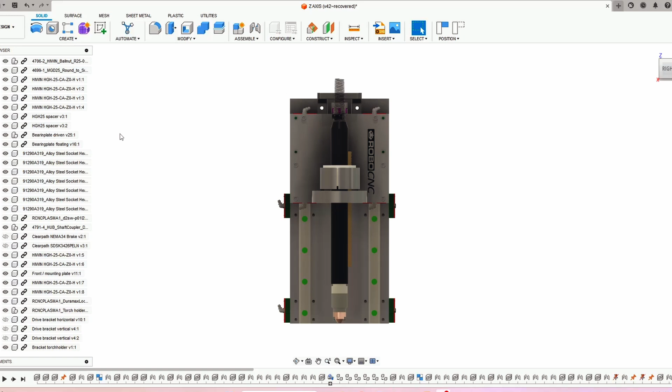So here we are in Autodesk Fusion, which I use to design the machine. This is the computer-aided design. Here we see the Z-axis as I'm planning to make it. Some parts are still missing, but we'll see those later on.

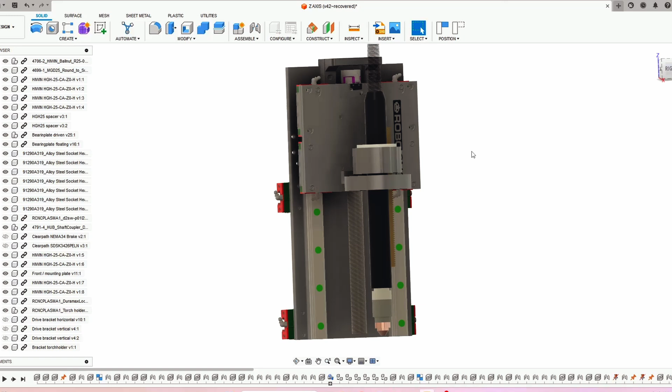It seems to be a bit of a beefy Z-axis, which is correct, because in an ideal world I hope to also be able to place a spindle on here when I take the torch off.

Anyway, we started in the first video with this machine torch and the Z-axis anti-collision system, and now we see some strange motion going on here in this Z-axis, which I'm going to explain later on.

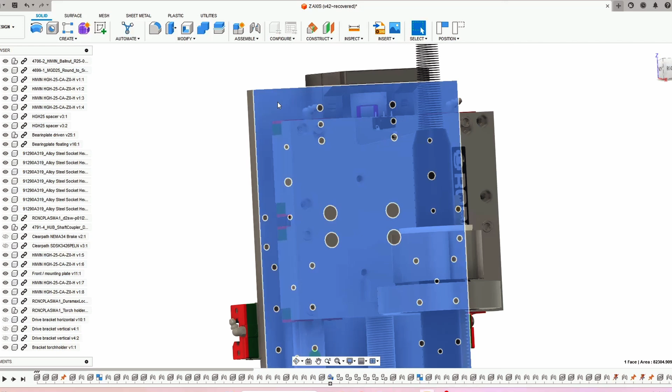But first we need to machine some of these aluminum parts. So let's hop into the workshop.

So the aluminum parts are ready. I'm starting the assembly, and if you want to skip over to the assembly you can do so due to the magic of video editing, because this video is chapterized.

If, on the other hand, you want to know how I made these aluminum parts on the CNC router that we built in another video series, you can see some small footage on the machining. So let's go.

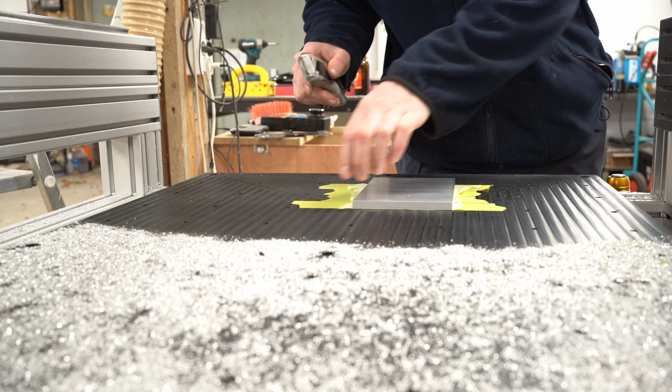It works absolutely amazing. You put the glue on one side, put the activator on the other side, align the part with some bolts, push it together, and it's tight - really holds on there firm. So I take the remaining tape off to prevent coolant from getting under the part due to capillary effect.

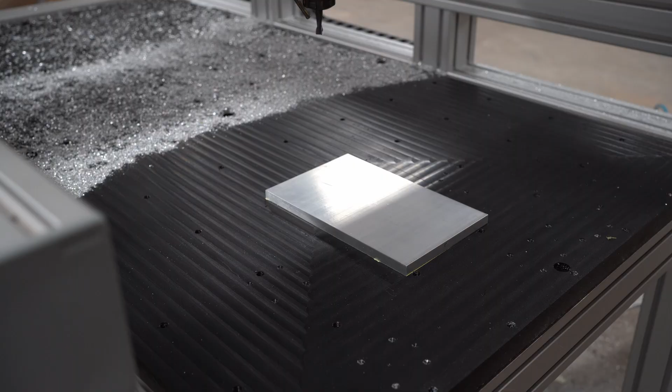So now it's time for machining, and I have no clamps to worry about while machining, which is absolutely fabulous. I made this strategy with Fusion CAM, computer aided manufacturing - it's the 2D adaptive strategy to prevent having to have a full width of cut.

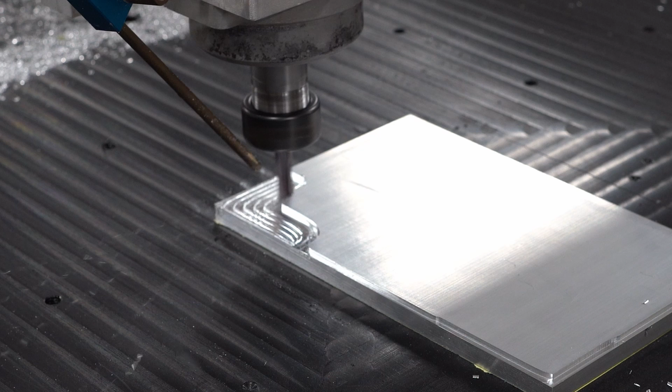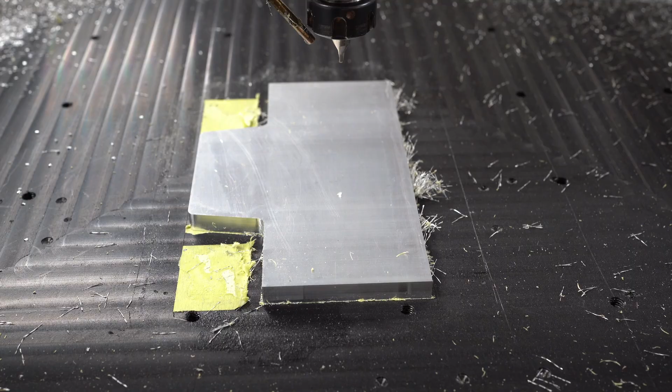You see me machining, and you see a mist coolant system - this is the Fog Buster, which I have a complete video on elsewhere on the YouTube channel. The coolant used is IPA alcohol, so it gets really cold and evaporates quickly without leaving residue on the part.

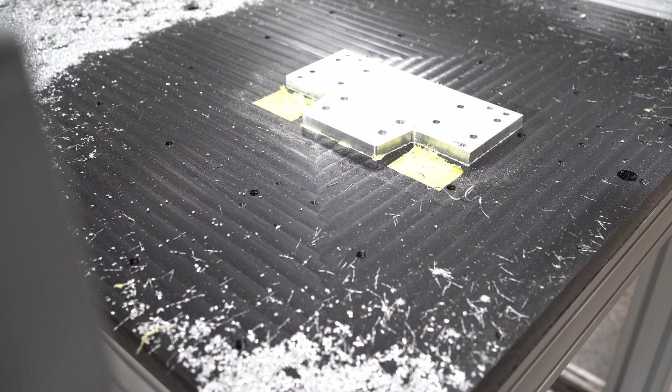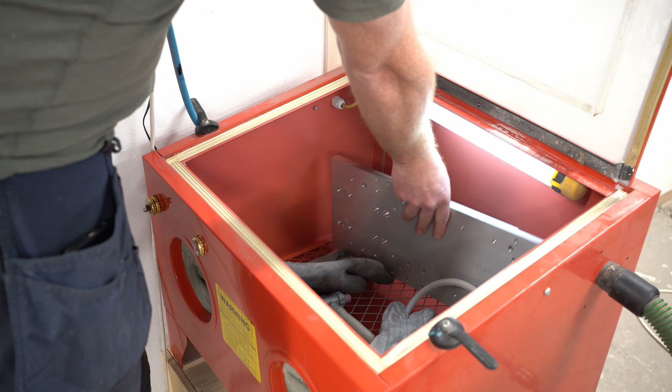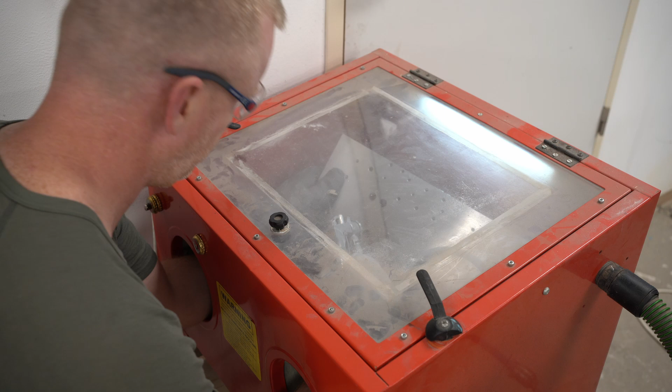So when the machining is done, you can break the tape bond and take the tape off, and you're ready to go. After machining in aluminum, I love to get a dull finish in the sandblaster - there's no sand in here, it's glass bead. The glass bead doesn't ruin the dimensional properties of the part, but gives it a dull finish with just some micro dents in the surface.

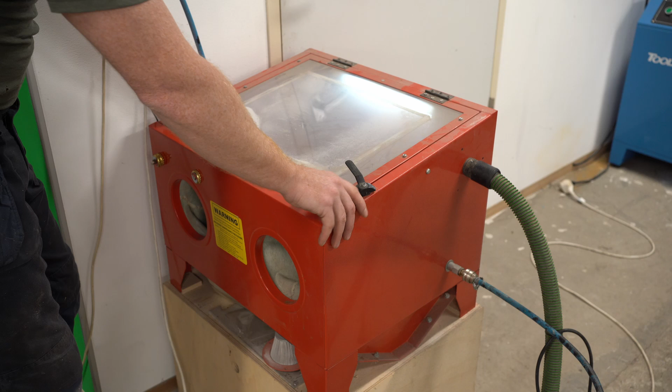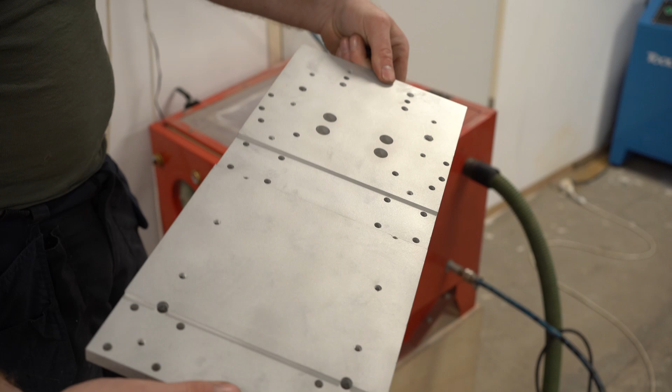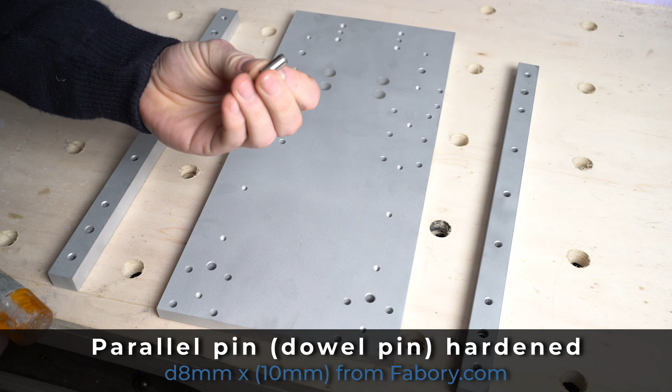So now it's finally time for assembly of the Z-axis. What you see here is the back plate, basically the backbone of the complete Z-axis, and on the sides are some spacers. These pins are 8mm precision dowel pins, and they make sure those spacers can only be placed on there straight and exactly parallel to each other.

Now, since we're going to use quite a big ball screw, a 25mm ball screw, I need those spacers between the linear rails and the back plate to give me some more space between the back and the front plate.

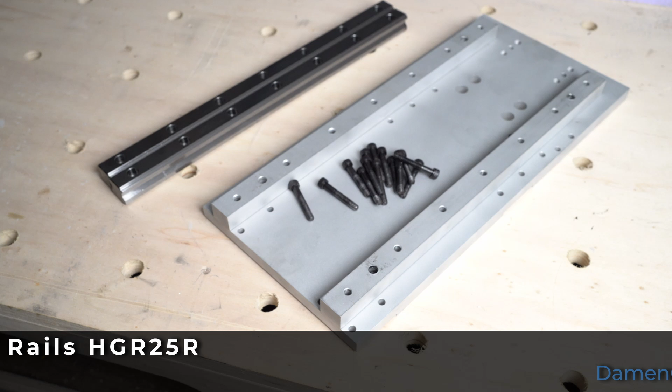So the rails I'll be using are the HIWIN brand, and I got them from DamenCNC. These HIWIN rails have an arrow on them pointing to the reference side, and although it's not all that necessary for this application, I tend to always put the reference side to one side. In this case it's pointing to the left.

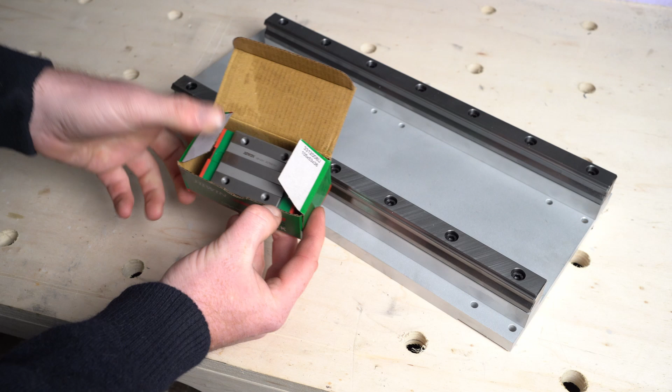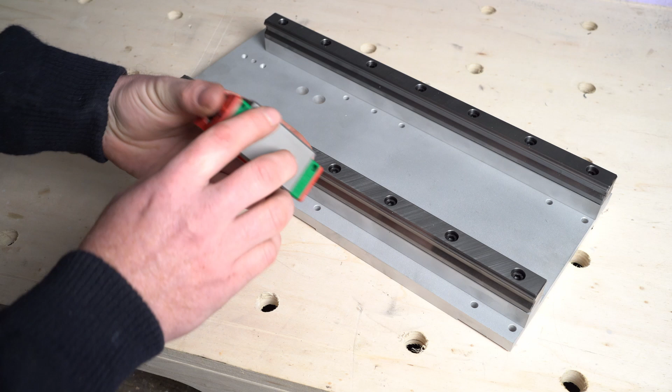So the rails are placed and the bolts are hand tight. Now it's time for the 25mm bearing blocks themselves. These bearing blocks are not symmetrical completely. You see one shiny surface and one dull surface on the side. The shiny surface is the reference side, so not this side, but this side is going to point to the left.

There's a little plastic ball retainer in there to make sure the balls of the bearing do not fall out. So push it against the rail, slide the bearing on the rail, and then you have the plastic part.

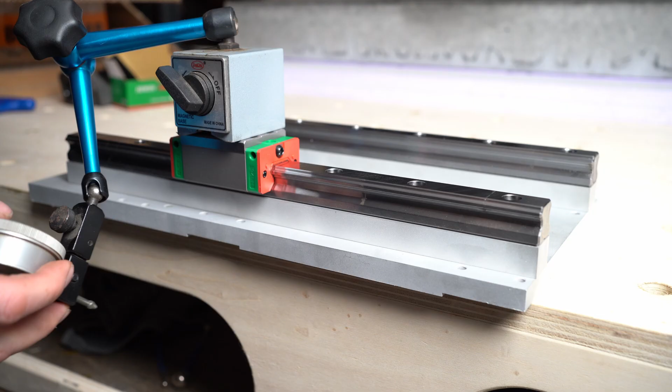Now it's time to align the HIWIN rail to the left side of the back plate. The left side of the back plate will be my reference. I use a magnetic dial indicator to align the left rail to the left side of the back plate.

When I was happy with the left rail and it was parallel to the left side of the back plate, it's time to align the right rail. So I put the magnetic base on top of that and I reference to the left rail.

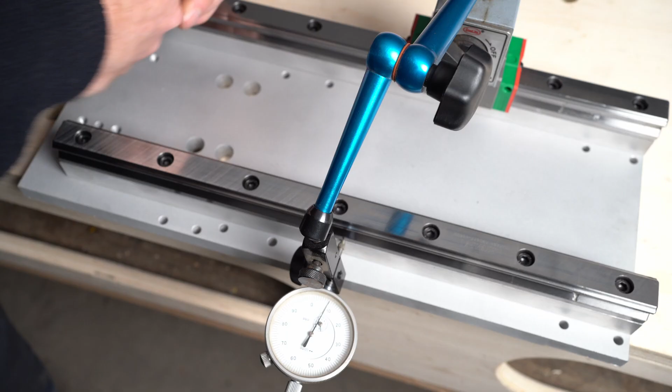Now the last part of the alignment puzzle for now are these heavy duty slotted spring type straight pins.

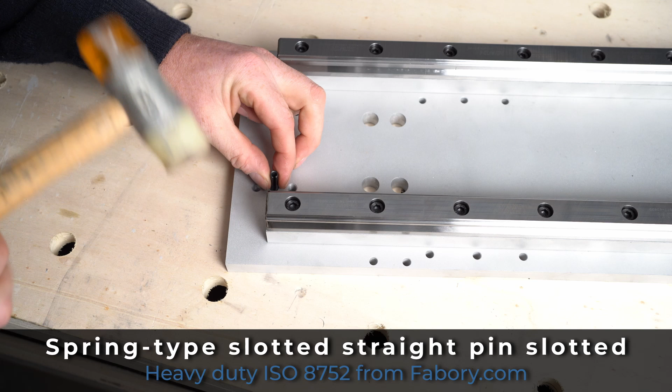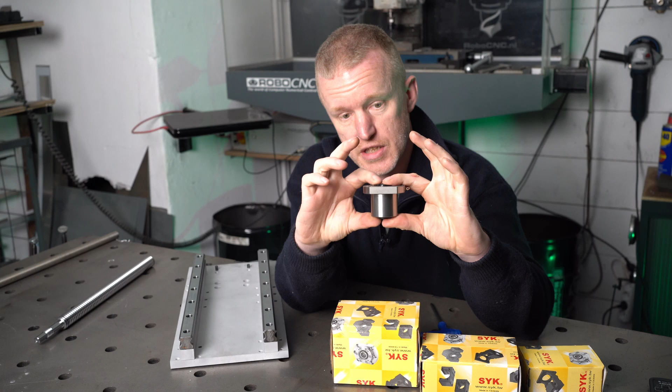The linear rails are on the back plate with some spacers, and the reason for that is that I'm going to use quite a big ball screw. This ball screw is 25mm with a 25mm ball nut.

Is that needed for a plasma table? No, it is for sure not needed for a plasma table, but as I told you before, in the ideal world I might use this Z-axis also for a spindle, like a router spindle, and in that case I would opt for a bigger Z-axis, so let's just make it big.

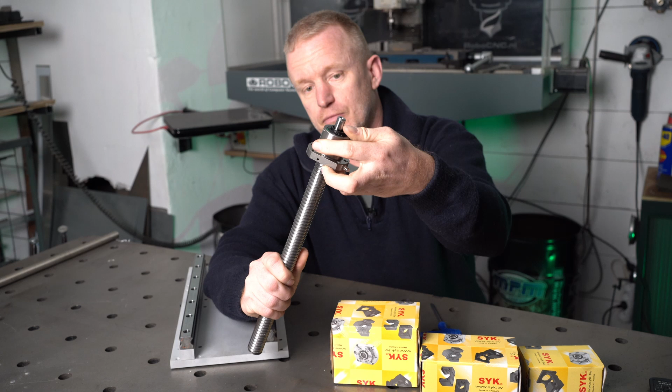A ball nut and a ball screw have to come together, and I've seen colleagues of mine, I will not call them by name, but I've seen them taking this off a ball screw, and afterwards they are on their knees finding all the little balls that are inside here. So if you want to do that, make sure to have a plastic ball retainer, just like with the bearing blocks from HIWIN.

I use the same technique, by using a piece of plastic to keep the balls inside here.

Now this size makes the need for the spacers. It will go in here, but to mount this all I have some SYK parts from Taiwan. I didn't order these from Taiwan SYK directly, I ordered them from RoboCNC.

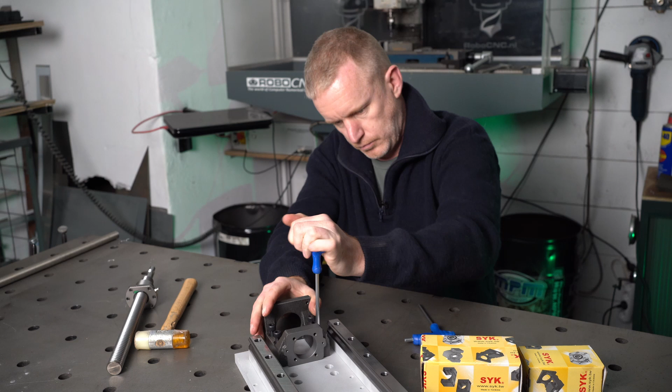So this bracket, the MBA15F from SYK, is going to hold the NEMA 34 motor on the top side. On the bottom side it's going to hold the FK15 fixed bearing for the spindle, and here in the middle there is some room for a coupler.

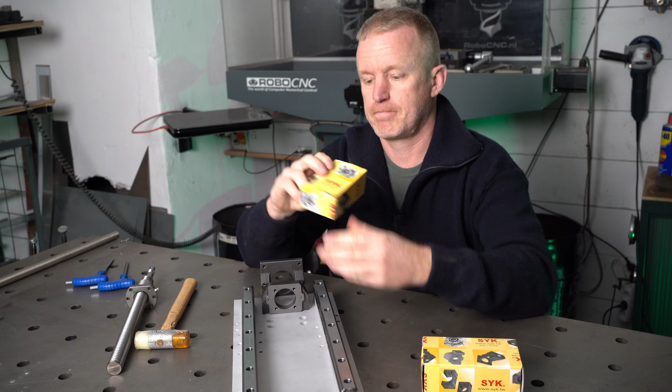Now this bearing, the FK15, perfectly fits in here.

So inside here is a double row angular contact bearing, if I remember correctly, and that takes up the radial loads like a normal bearing. Because it's spinning, it has some radial loads, and that's taken up by this bearing. It's supported by this bearing, but also the axial loads.

So this spindle is going to push down and upwards, and especially when there's a router or spindle on the z-axis, there will be a lot of axial loads, and that will be taken up by this bearing.

As SYK told me, there are a lot of clones of this bearing. You can buy these Chinese clones for a lot cheaper, but this is C3 quality, and that's not comparable with the C7, for instance, or whatever you get from AliExpress. Anyway, I will fix this now to the bracket.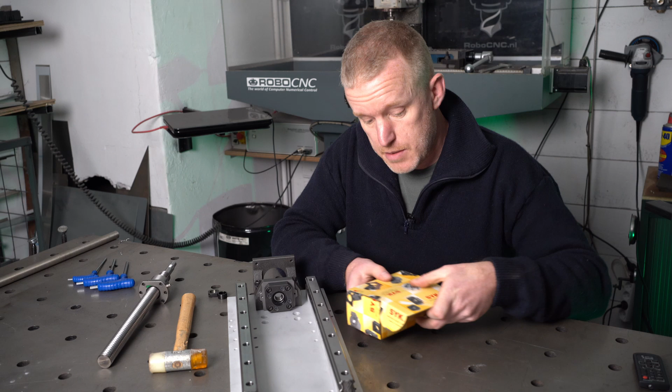So the last SYK part is this ball nut bracket. This bracket will convert the round formed ball nut bracket to a square one.

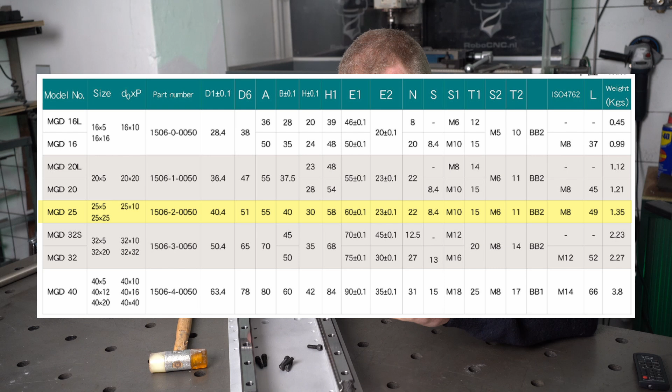To be honest, this is a bit beefy for my application, but it's not that expensive, and machining it myself, well... so let's put this on here.

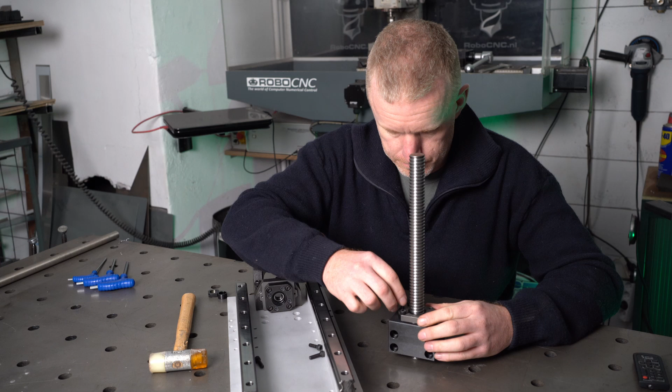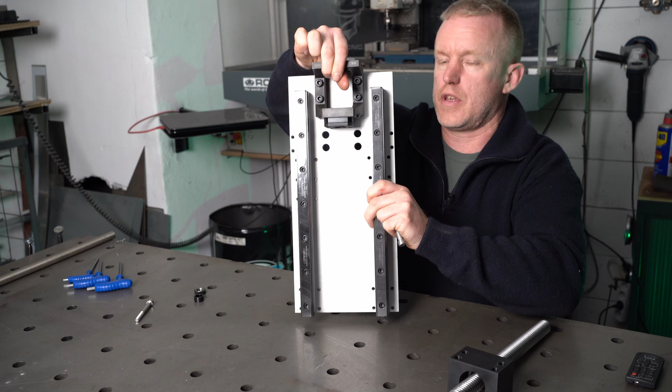Directional. On one side fits the bolt head to make it flush, and on this side the bolt sticks out. And now you can probably also see what these big holes are for.

So that I can mount these bolts. So last thing to do, fit this inside the bearing. These two little parts came with the bearing, a ring which goes on, and a locking nut.

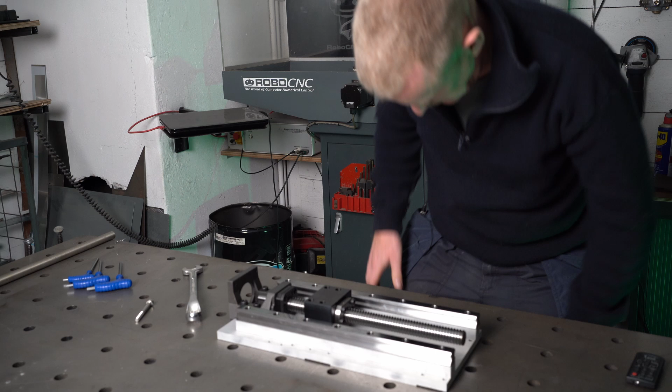Bearing blocks come with a grease nipple, which I will put on later. I will put the reference side up to the left side, push them on, and always keep these, they come in handy.

This thing is starting to look like a Z-axis.

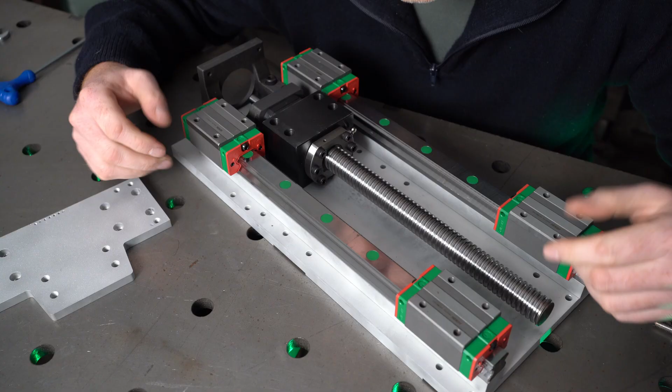So due to a battery failure, you missed out on the most satisfying part, and that is putting the green caps in. I'm sorry. You will have to subscribe to another YouTube channel to see that.

Well now, the next aluminum plate, and this one is the front plate, but it's the driven one. I will explain that later on.

This aluminum plate is now on the top row of the HIWIN blocks, and this is the plate that will be driven by the ball nut, or by the ball screw with the ball nut with the bracket. Now I have to turn this over.

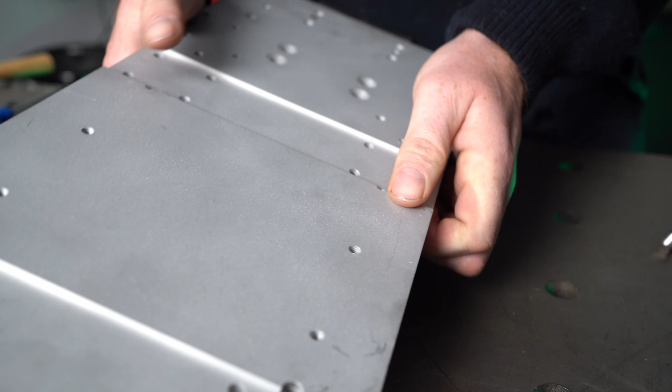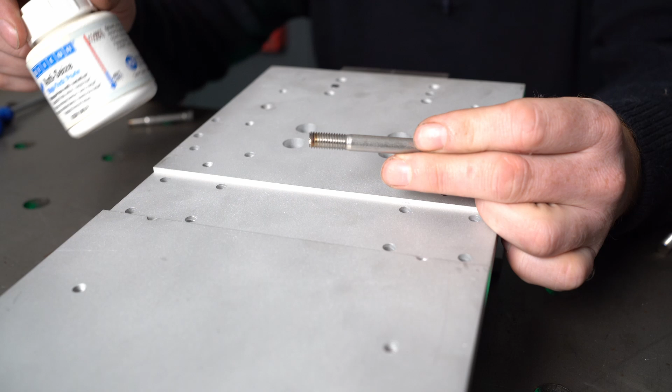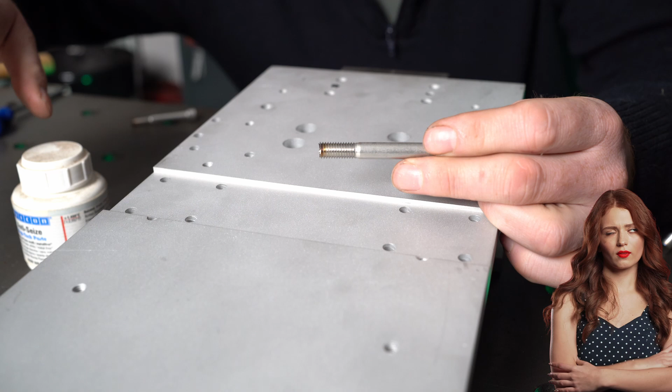And put these bolts through the bracket inside the plate. But since these are stainless bolts and the plate is aluminum, which I do not recommend, but why do I do it then? Because I had these laying around.

Use some anti-seize. Putting on a bit of anti-seize, because really stainless steel will seize itself in aluminum. Don't be as stupid as I am by putting these in.

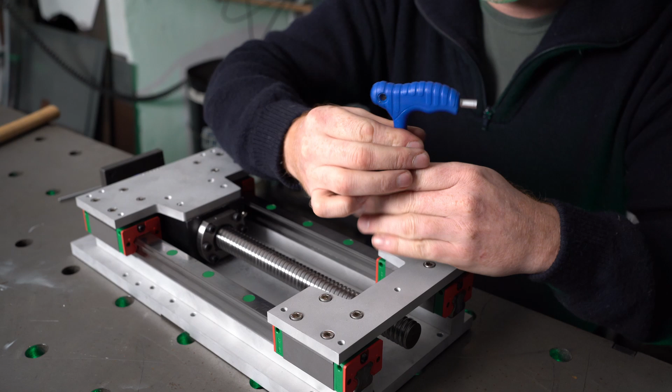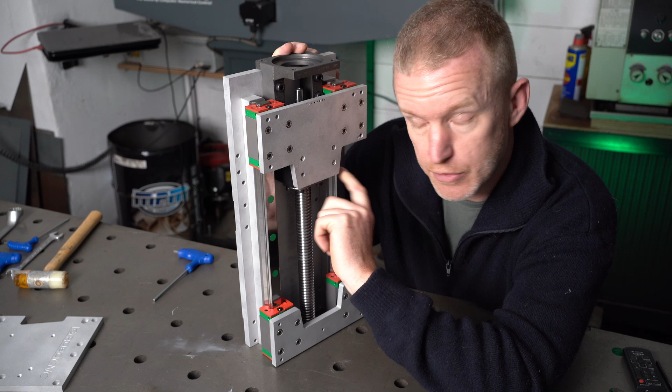So in theory, the bearing blocks should have been exactly the same height as the bracket that retains the ball nut. But in reality, there was too much friction.

So I had to use a thin sheet of copper to give it a little bit of extra space. And I didn't manage to film that, because I was crying, of course. So anyway, this is really starting to look like a Z-axis.

I will explain it in more detail, but this plate with the nice engraving should be mounted on top of this one, and then it should slide just in front of this plate. So if you manage to get that right.

Then you're fine, and otherwise you will have to shim this a little bit so there's no friction between this plate and this plate. So I will now mount this and we will see, and otherwise I will shim it again. Almost lost my bearings.

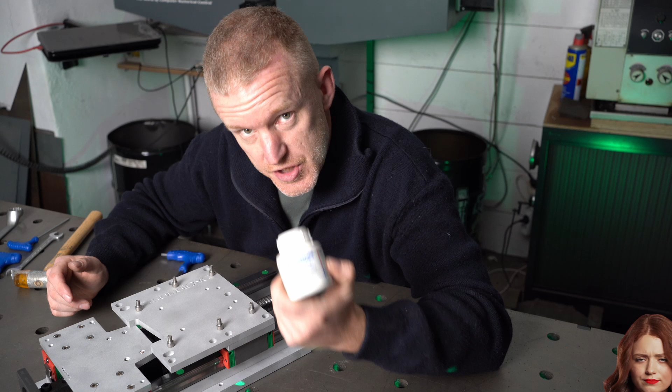Again, stainless steel bolts, because I had them laying around. In aluminum, use anti-seize. I really don't use stainless steel bolts, basically, in aluminum. And if you have to.

Maybe someone in the comments can explain why stainless steel and aluminum seize up. Could be interesting.

So it's not completely smooth, so I am going to shim it. So now it's smooth. Okay.

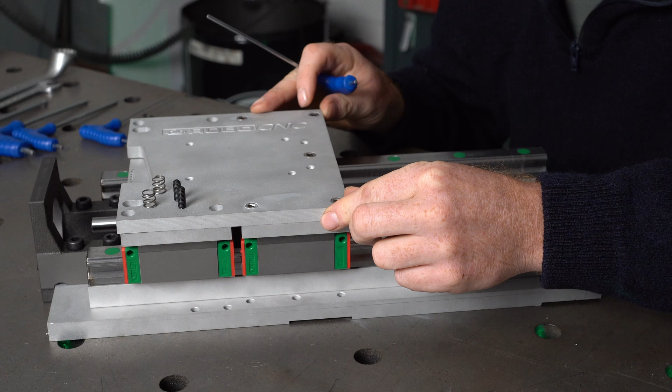Mounted on the floating bearing plate is the front plate, and this front plate needs to be fixed somehow to this top plate. So if I slide it up there, I could bolt it down when I'm going to use a spindle motor, but for now I'm going to use.

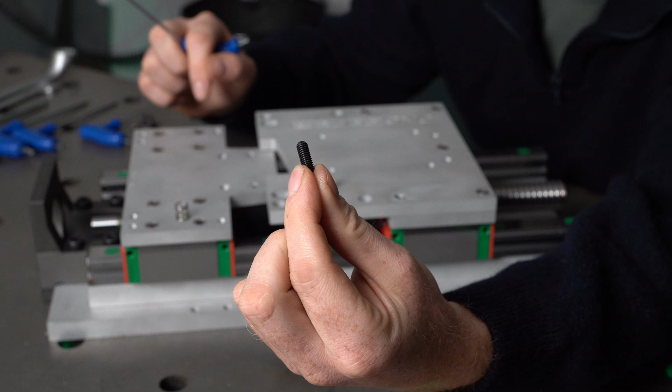Two of these little springs and two of these little set screws. Let me bring you in a little bit closer.

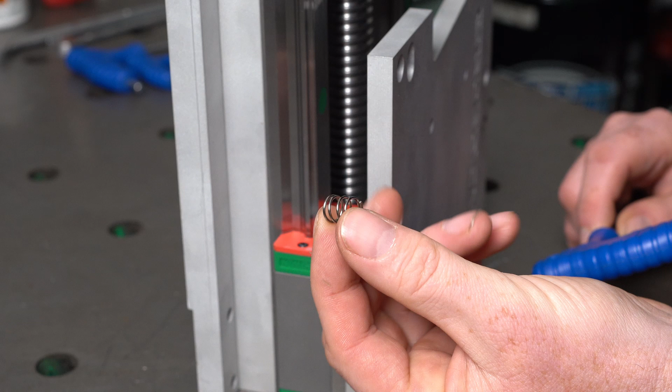These bearing blocks can hold a grease nipple on either the upper side or the lower side. So I'm going to leave the screw that closes it off in between the two bearing plates and place this tiny little spring exactly on top of it. And it's a really snug fit.

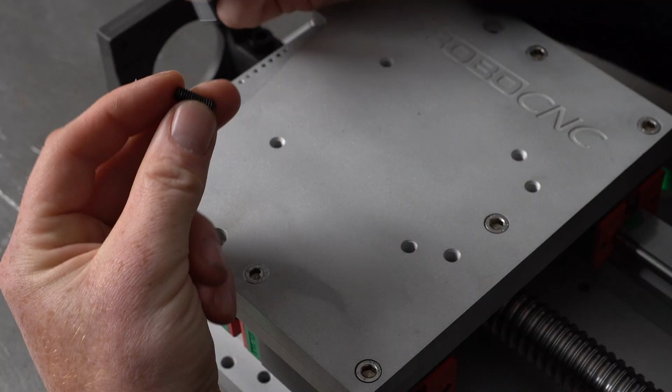Now with both springs in place, I'm gonna slide this up and lay it down. Now I'm gonna take one of these little set screws and put them in these oval shaped holes. So this oval shaped hole will make sure I have still got the play in the up and down motion.

But first I'm gonna take a little bit of Loctite 242, a bit of thread locker, to secure this in the aluminum plate.

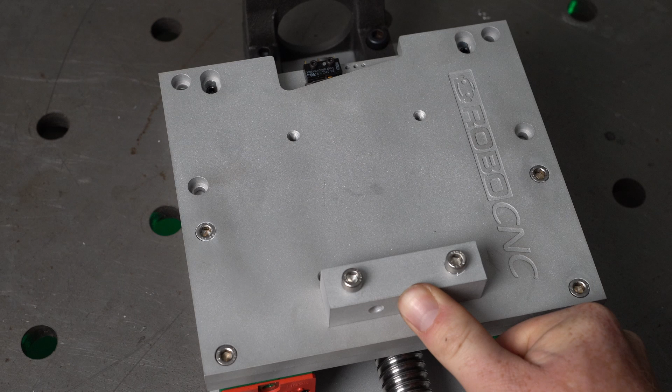So the little bracket I just placed on there is to hold the anti-collision system you saw in video 1. On the top you saw a little microswitch that is triggered against the spring tension. I will do a separate video on explaining all that stuff in more detail and also telling more about the different options you have there, but know that the torch that is going to cut the material needs to know where the material is. So now it can travel down, this plate goes up against the spring tension, triggers the little switch, and now the plasma torch knows where the material is that it needs to cut.

Next step is the motor, and there are a lot of options when choosing a motor. We already know it's going to be NEMA 34, but let's do a separate video on that.